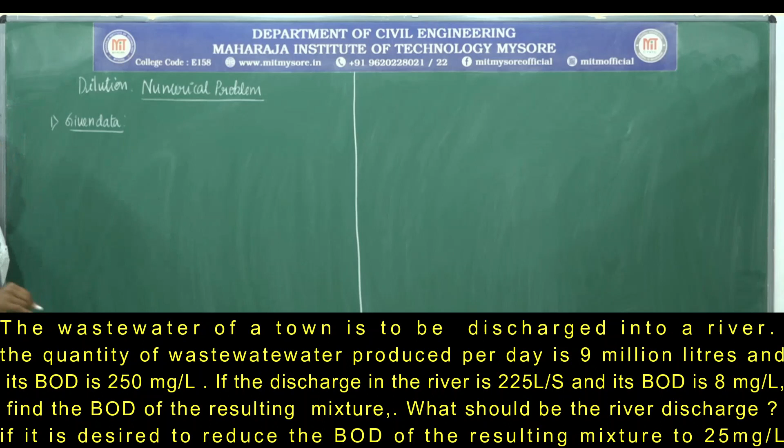Okay, now let us solve the numerical problem related to dilution. First problem, what is the given data? The wastewater discharges - what is the amount of wastewater discharged into the river? Please do have a flow diagram while analyzing the question.

There is a discharge of the wastewater, QE, with concentration CE. There is a discharge of the river, QU, with concentration CU. This wastewater is discharged into the river.

The quantity of wastewater produced per day is 9 million liters, that is 9 MLD, and its BOD is 250 mg per liter. BOD is nothing but instead of CE, you can take it as YE, which is equal to 250 mg per liter.

If the discharge in the river is 225 liter per second, and its BOD is 8 mg per liter, I'll take it as YU or CU, which is 8 mg per liter. Don't confuse it with ultimate BOD, it is the upstream or river value.

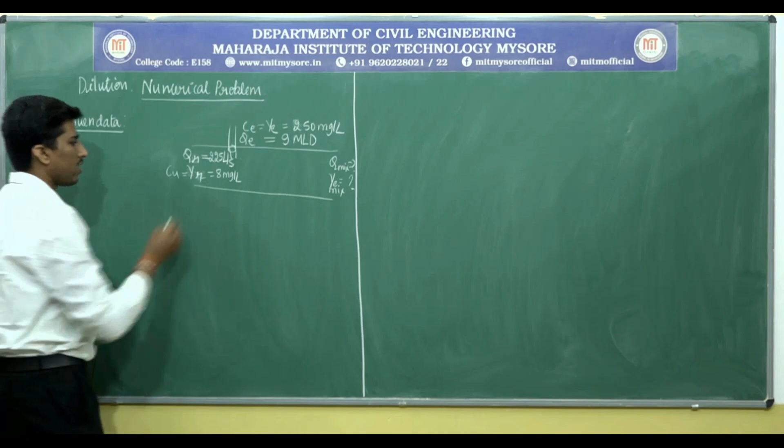Find the BOD of the resulting mixture, they have asked - that is Y mix. When they discharge in combination, you can also determine what is the Q mix. This is how you need to analyze the problem in the case of a river or stream.

What is the formula given? Whenever you need to determine the concentration - CE, YE, or Q into S - the general dilution formula is: S equals QU or QR, SR plus QE, SE, divided by QR plus QE. You can also denote it as Q.

Similarly, for the upstream part of the river, QR is 225 liter per second, YR is 8 mg per liter. The first part of the problem you need to determine is the BOD mix in the river.

Using the same formula, I need to determine Y mix, given as QR, YR and QE, YE divided by QR plus QE. This is equal to QR into YR, that is the concentration mass loading rate, at 225 liter per second.

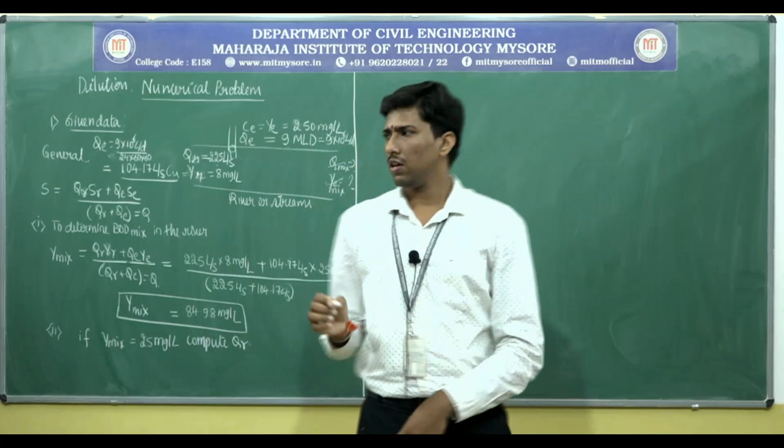Second question: if Y mix is 25 mg per liter, compute QR. Now let us take it this side. Again apply the same formula. Here Y mix is equal to QR into YR plus QE into YE, divided by QR plus QE.

Now you need to compute QR if the Y mix is 25 mg per liter. So 25 is equal to QR, I don't know what is the discharge, but YR I know, same concentration, into 8, plus QE given as 104.17 liter per second into YE value, which is 250 mg per liter, plus QR I don't know.

QE is given as 104.17. Now, which implies that 25 into QR plus 104.17 is equal to 8 times QR plus 104.17 into 250. How much are you going to get?

104.17 into 250 gives 26042.5.

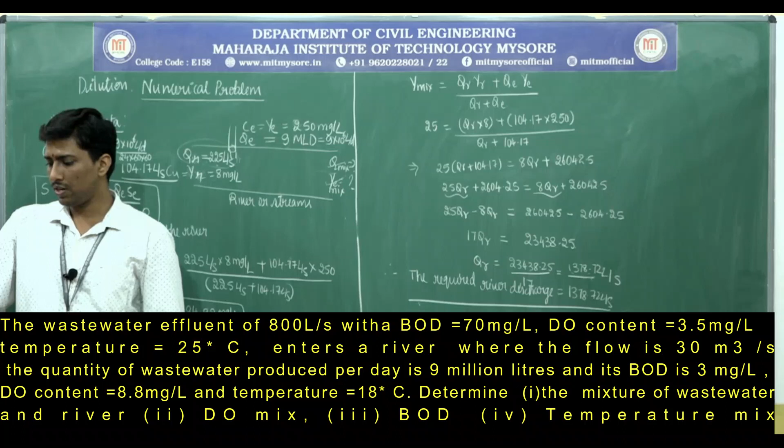Let us get to know what is the background concentration. Make a diagrammatic representation, it will be easy for you. Given data, by reading the problem you need to analyze what are the contents.

Again there is a flow of the wastewater having the background concentration BOD, DO, I could take it as C, and temperature is equal to. Similarly for the river discharge, BOD concentration, DO concentration, as well as the temperature also.

How much are they asking? The wastewater effluent of 800 liter per second, with BOD given as 70 mg per liter, Y is equal to 70 mg per liter.

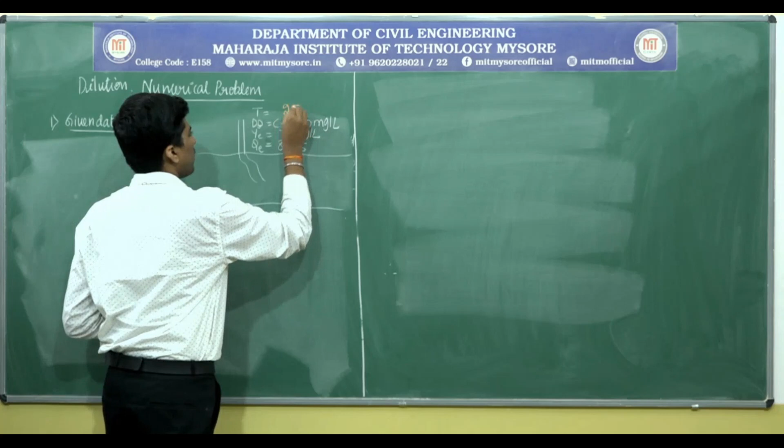And C is given, what is that? The DO is 3.0 mg per liter. And temperature is equal to 25 degrees Celsius.

Enters a river. This is the wastewater effluent discharge. This is the river. Mixing process.

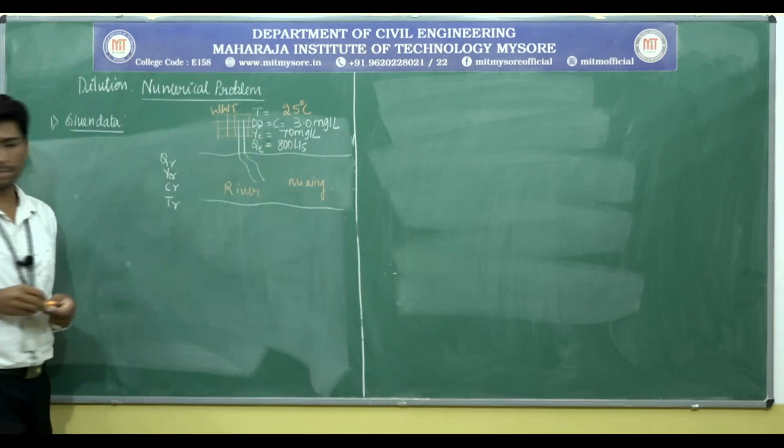Enters the river, the flow is 30 meter cube per second. Observe it clearly, this is 30 meter cube per second, whereas this is in terms of liter per second. You need to convert it in terms of meter cube per second.

Next, YR is given, what is the YR value? The BOD is 3 mg per liter. What is the DO concentration? 8.8 mg per liter. And the temperature is 18 degrees Celsius.

What have they asked? First, determine combined discharge - obviously you need to determine what is Q, that is nothing but the downstream discharge. Second, combined discharge BOD. Third, they are asking about the DO. And fourth is related to the temperature.

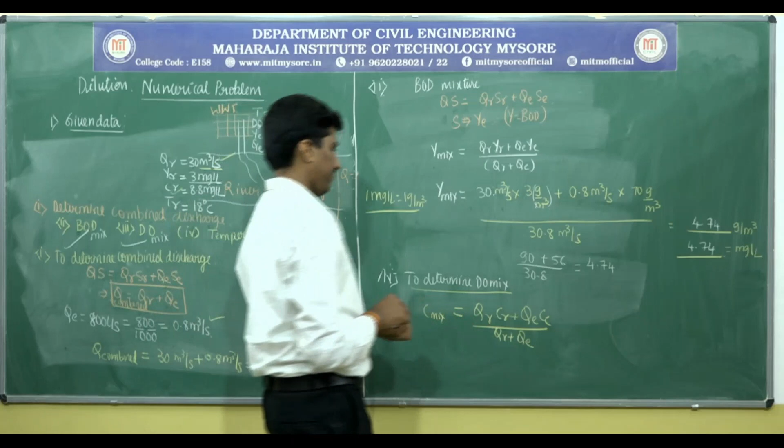C mix is equal to QR.CR plus QE.CE divided by QR plus QE. C mix you have got to replace it by this formula. Replace it instead of YE here, you can take it as CE. Now what happens? QR, what is the discharge?

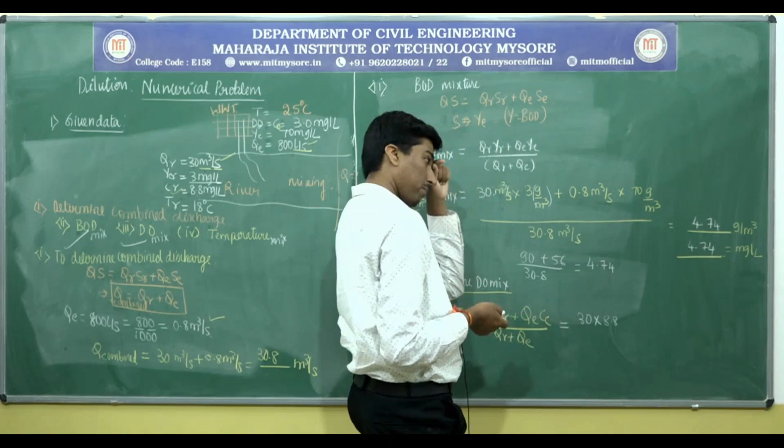Given as 30 into what is the concentration of DO here? It is 8.8 mg per liter. Again it is converted in terms of gram per meter cube, plus 0.8 is the discharge of the effluent, 0.8 meter cube per second, into the DO which is 3.0 mg per liter. That is divided by 30.8.

2.4 plus 30 into 8.8. So here we will get it as 30.8, 30 into 8.8 plus 0.8 into 30, gives 264 divided by 30.8. The resulting DO mix is 8.57 mg per liter, or it is also expressed in terms of grams per meter cube.

Remaining part is what? To determine what is the T mix. Replace CR by T, or replace it by T, whatever formula we are applying here, you need to replace it. Now the third one is to determine the temperature mix. T mix, temperature mix, is equal to QR into TR plus QE into TE, divided by QR plus QE. We call it T mix.

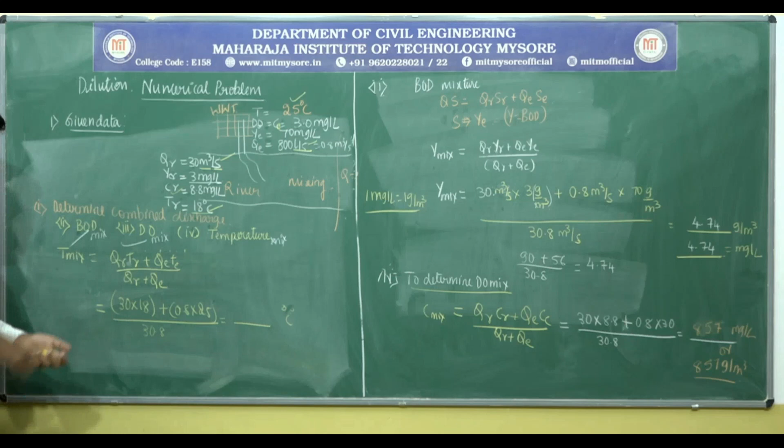Divided by 30.8, how much? Calculated and expressed in terms of degree Celsius. 30 into 18, plus 0.8 into 25, 0.8 into 25 gives you, total of 560 divided by 30.8. The average resulting temperature you get is 18.18 degree Celsius. This is how you need to determine the temperature mix conditions.

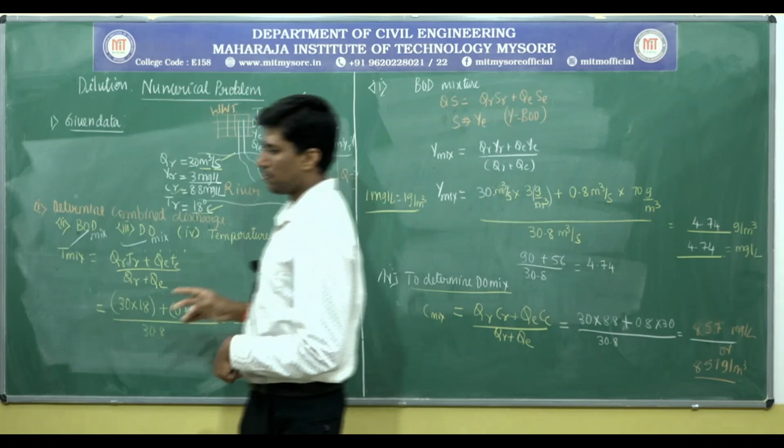In any of the question papers, or wherever they ask for any discharge concentration, you need to determine it by application of the dilution technique, or the method of estimation of the wastewater discharge. Okay, getting the points clear for this. Now take down the next problem.

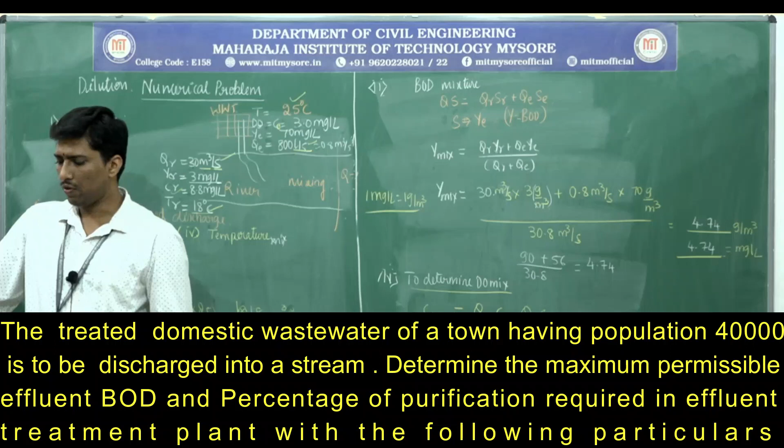It is quite different. The treated domestic wastewater of a town is to be discharged in a stream. Determine the maximum permissible effluent BOD and the percentage purification required in the treatment plant, with the following particulars. What are those? Let us get to know the others. Population of town is 40,000, given data. This is the third problem. Population of a town is equal to 40,000.

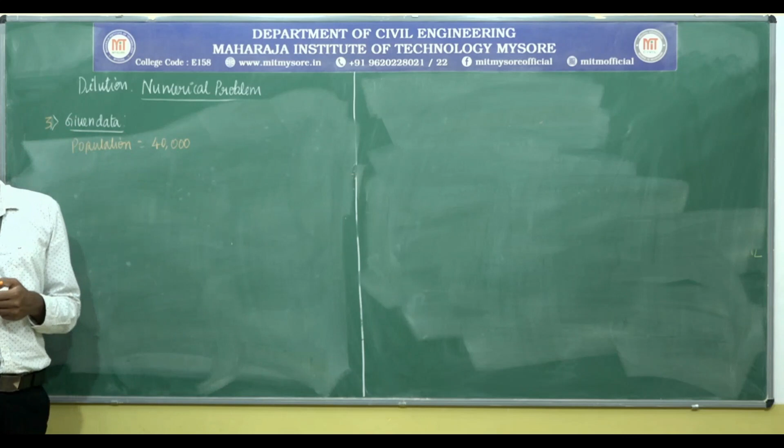Minimum flow of stream is QS here. It is QS, minimum flow of stream, how much? 0.15 meter cube per second. Next, BOD of stream, you can take it as YS. BOD of stream YS is equal to, how much concentration? 2 mg per liter. Dry weather flow of wastewater.

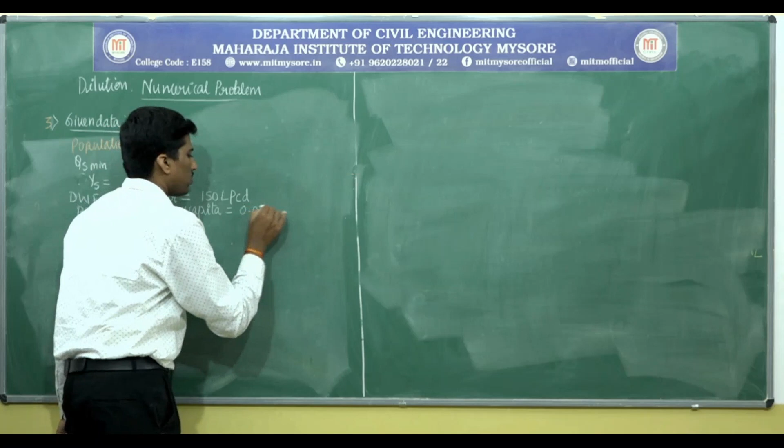Wastewater is equal to how much? 150 liters per capita per day, that is 150 LPCD. BOD contribution per capita is equal to how much? It is 0.075 kg per day.

Maximum BOD of stream on downstream is equal to how much? Given as 5 mg per liter. Now let us analyze the same set of flow conditions.

It is given, stream population is given, BOD contribution I need to estimate. What is the discharge as well as the BOD I need to determine, then only I can get to know what is the purification given. Here contribution per capita is given as 0.075 kg per day. Now let me compute what is the dry weather flow of sewage.

I need to determine what is the QE. Q of dWF is equal to question mark. Now solution I need to provide it. First, determine the dry weather flow.

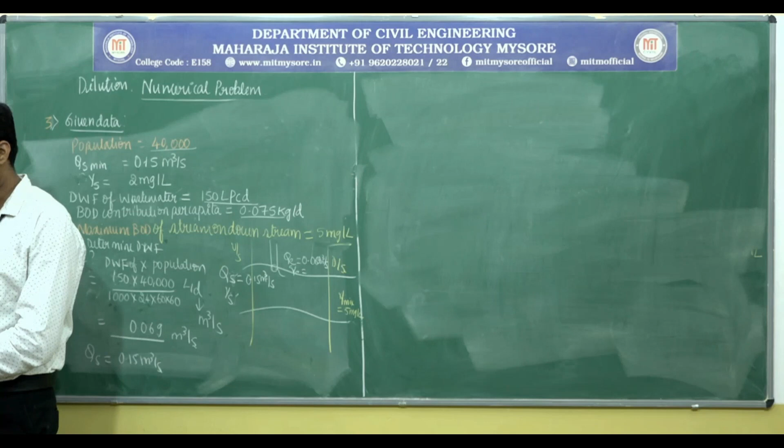Observe the question carefully here. Determine the maximum permissible effluent BOD and the percentage of purification required. Maximum permissible effluent BOD. That is, YE is a question mark, because YS is given as 2 mg per liter.

Solve the formula. We know the dilution factor formula, that is, I have the maximum BOD, the downstream is given as, so Y mix is equal to QS into YS plus QE into YE, divided by QS plus QE. This is QS, how much it is? 0.15 into YS. YS is in terms of 2 mg per liter, 2 mg per liter into 2.

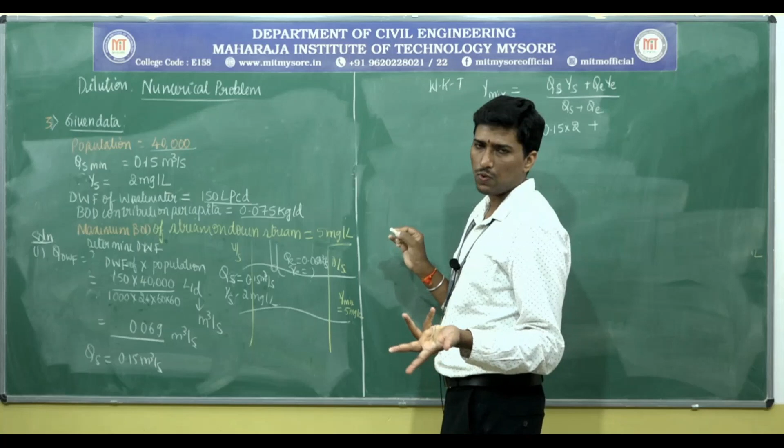Don't worry about the conversion factors. Anyhow, it is gram per meter cube only you are getting, the gram per meter cube is nothing but again 1 mg per liter. Now into 2 and QE, I know QE is equal to 0.069 into YE. I don't know what is the effluent contribution of the BOD, but have contribution per capita.

What is required is the maximum permissible limit, only 5 mg per liter. So this is the standard they have set. If you need to have the proper standards to comply with 5 mg per liter, what should be the discharge of the effluent containing the BOD concentration that they are specifying, or how much percentage of purification is required. YE divided by, QS is 0.15, again QE is 0.069. Y mix is given as how much?

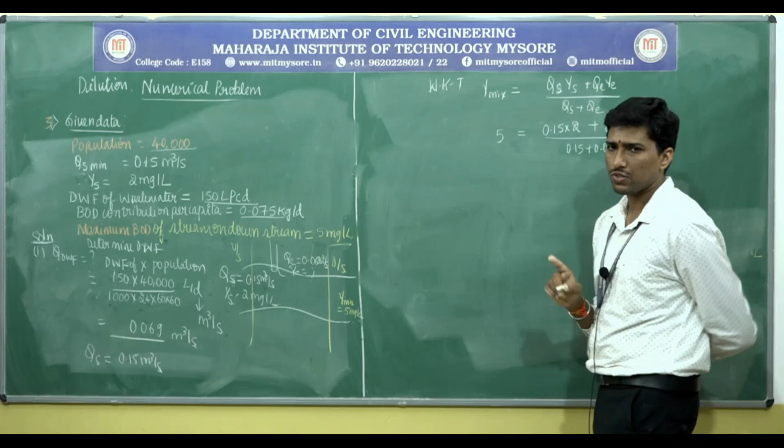At the downstream, it is 5 mg per liter, that is the maximum permissible limit concentration. This is how you need to analyze the problem. Simply you cannot go by heart, learning all these things.

Now I need to determine YE. So 5 into how much you are going to get it? 0.15 plus 0.069 is equal to 0.15 into 2 plus 0.069 times of YE. I'll make it as YE itself only. 5 into 0.15 plus 0.069.

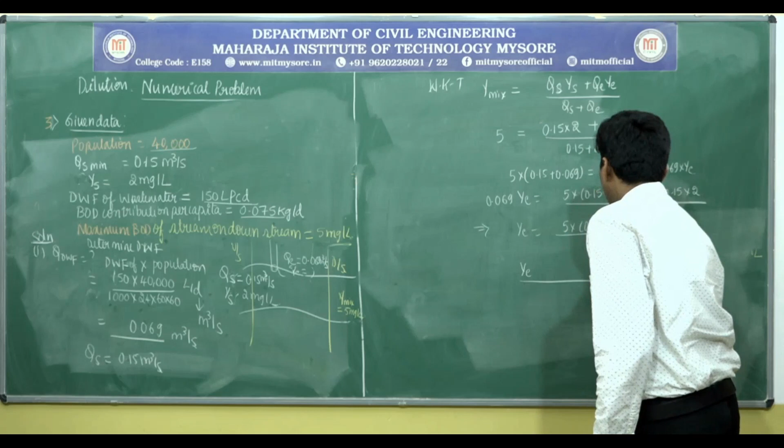Minus 0.15 into 2 divided, so this is 0.069 times of the YE, which further implies that YE is equal to 5 into 0.15 plus 0.069 minus 0.15 into 2, divided by 0.069. Compute what is the YE in terms of mg per liter.

This is how you need to compute it. After computing it, you get the answer as 11.52 mg per liter. What they are asking is the maximum permissible BOD, maximum permissible BOD is 11.52 mg per liter in the effluent discharge.

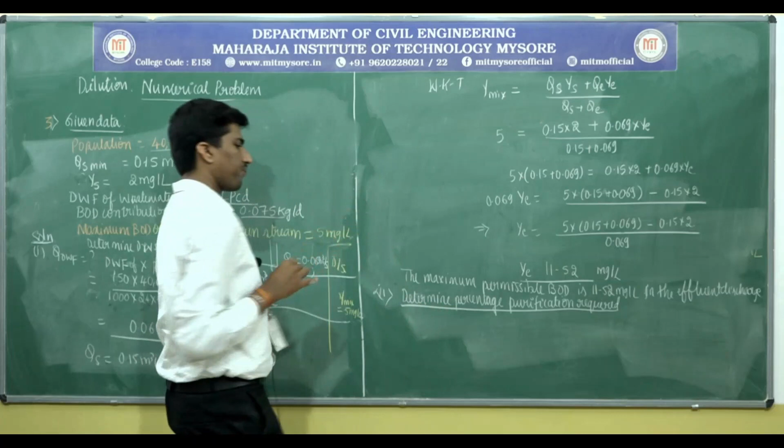Effluent discharge. Second, they have asked what is the percentage of purification required. The next question: BOD and the percentage purification required in the treatment plant. Determine percentage purification required. I need to determine what is the concentration, if the maximum permissible limit is given, what was the actual concentration I need to determine.

Actual BOD of effluent I need to find out. First, determine actual BOD of effluent. That is given by BOD in mg per liter, which is nothing but the per capita contribution.

That is, BOD contribution is 0.075 kg per day, and we have it, I need to get it in terms of effluent BOD in mg per liter, that is BOD contribution in per capita divided by.

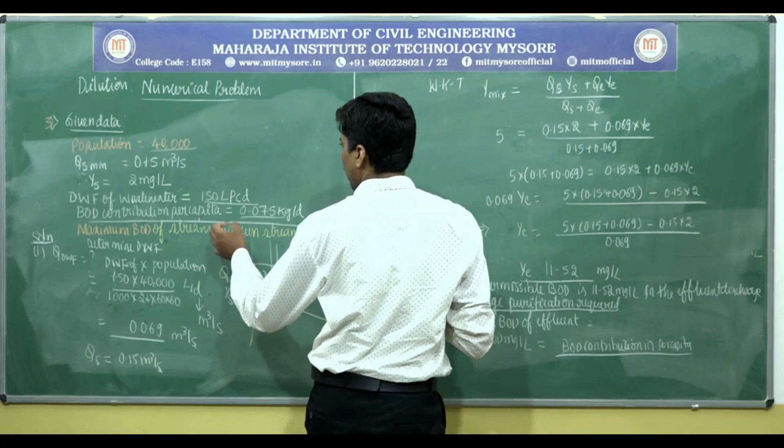They are asking the concentration, so C is nothing but W divided by Q. The waste effluent discharge, that is per capita, they are asking it as dry weather flow. What is dry weather flow? Remember the formula, this is helpful.

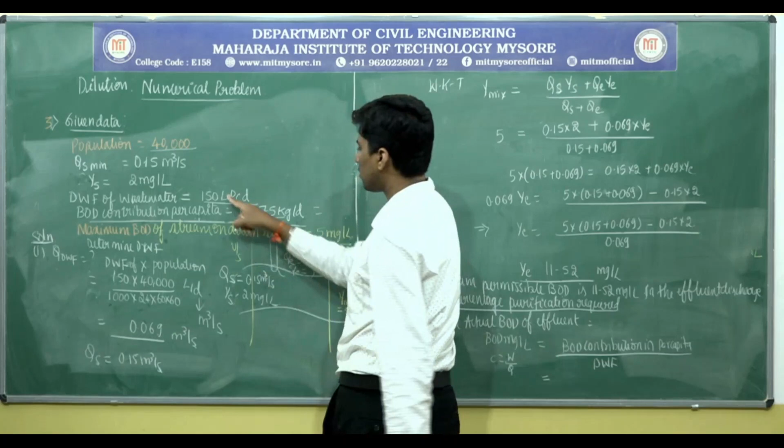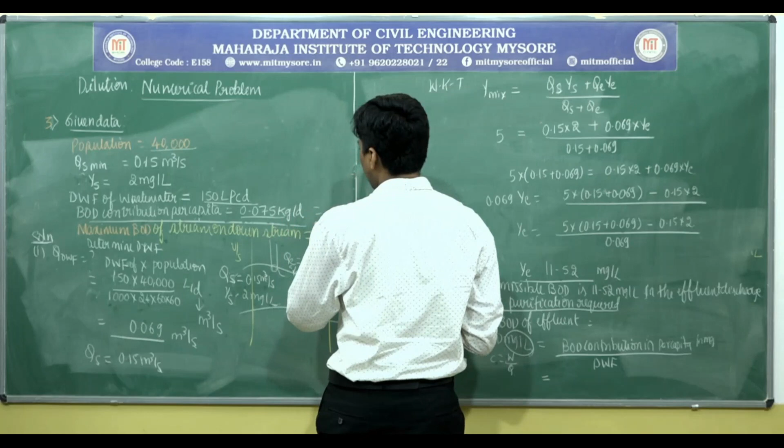How much BOD contribution is given as 0.075 kg per day, and here it is in terms of liters. What I require is BOD in terms of mg per liter. I need to convert the kg into mg. So multiply by 10 power 6, because 1000 milligrams makes 1 gram, again 1000 grams makes 1 kilogram.

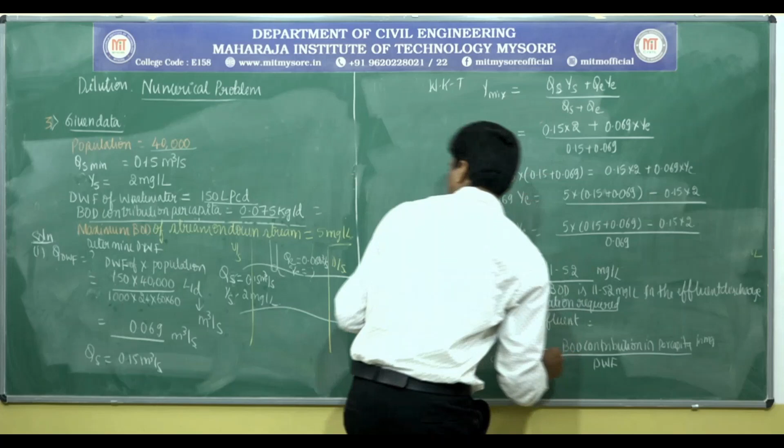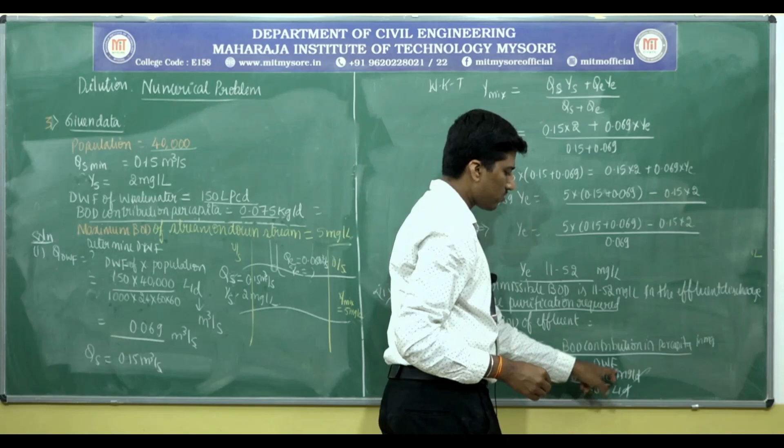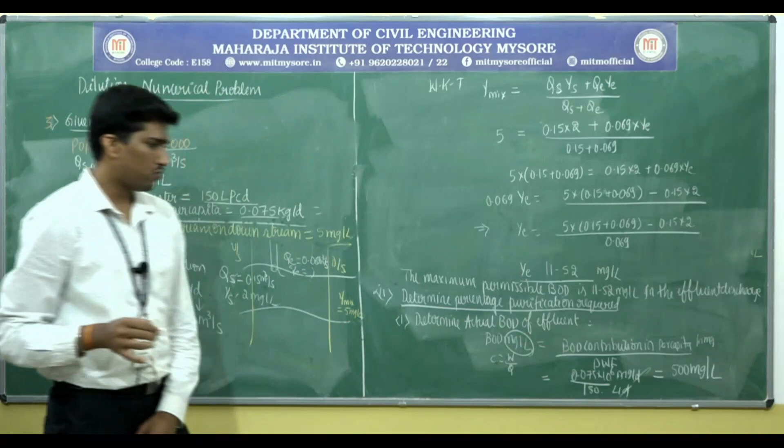0.075 into 10 raised to 6, divided by 150. This is in terms of kg, mg per day, and this is in terms of liters per day. Per day and per day get cancelled here. 0.075 into 10 raised to 6 divided by 150, that is equal to 500 mg per liter, because 15 times 5 is 75. This is the actual, Q actual, that is YE actual is 500 mg per liter.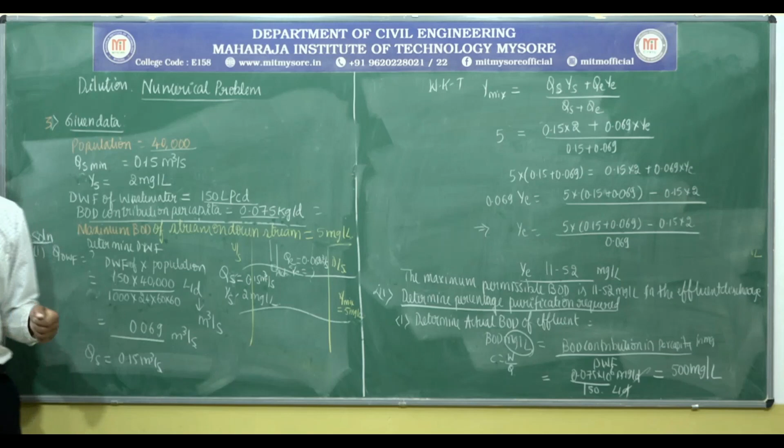But Y mix changes. If desired, how much is the percentage of purification? You need to determine it. Okay, let me complete it here. Thereby, compute percentage of purification.

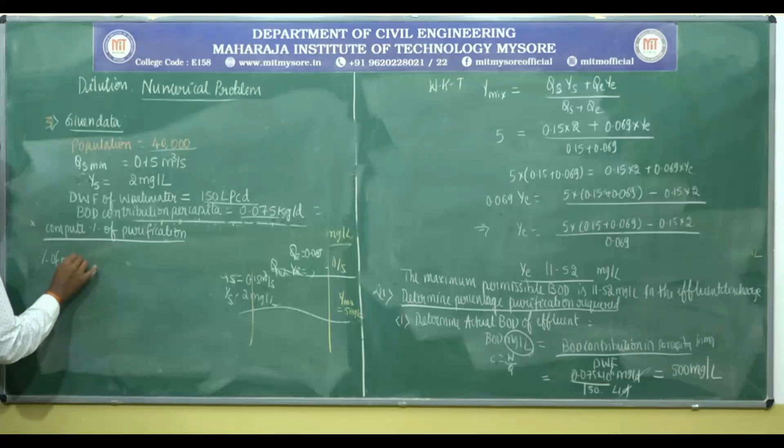Percentage of purification. When you compute the percentage of purification, it is expressed as actual, that is Y actual, BOD of the actual, minus what is the permissible BOD, Y permissible, divided by actual, Y actual, whole thing multiplied by 100. I don't have space here, that's why I am writing it here.

That is Y actual is equal to 500, getting it, 500 minus permissible is how much, 11.52, maximum permissible 11.52, divided by 500, gives you into 100, in terms of percentage, 500 minus 11.52 divided by 500, it is around 97.7%.

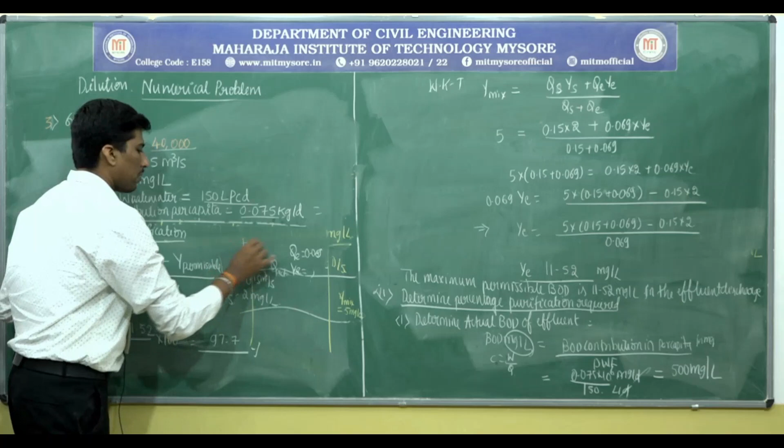97.7%. That means when you are discharging the concentration percentage, for you getting 11.52, instead you have it as 500. To bring down 500 to 11.52, 97.7% of purification, so the efficiency of the treatment has to be imparted in the wastewater treatment plant. Efficiency should be equal to 97.7%. That's what they are asking.

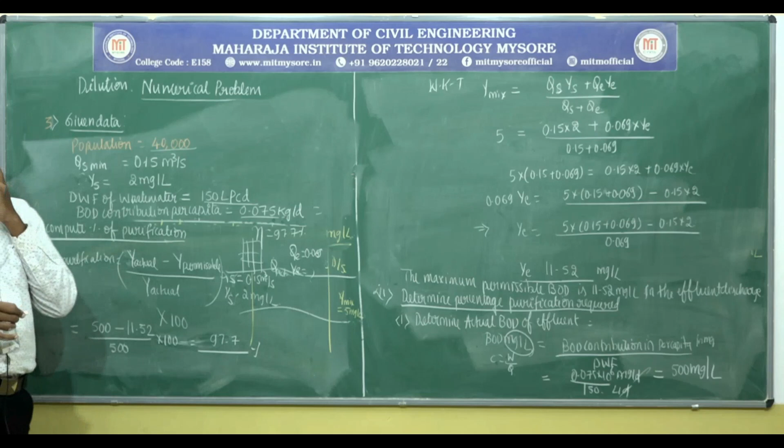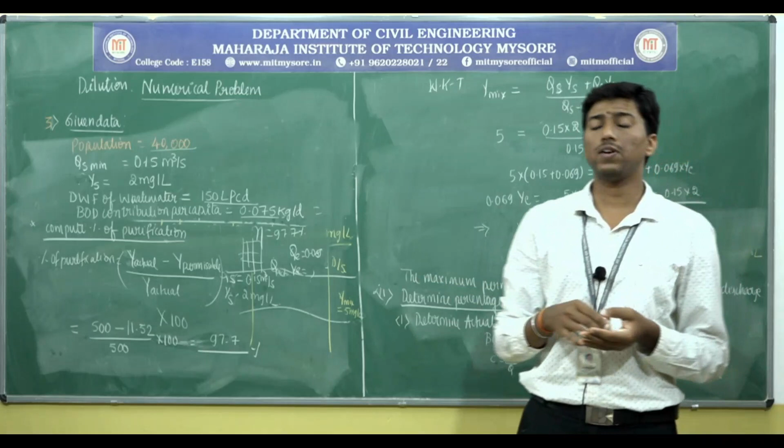Okay, these are another set of problems that we tend to solve. Hope you have understood the problem, how to calculate in these situations. Analysis becomes very much important in wastewater effluent disposal. Here onwards, thinking as well as analyzing becomes very important, and applying the concepts in practical aspects through the line diagram is important. With this, I'll wind up the class.

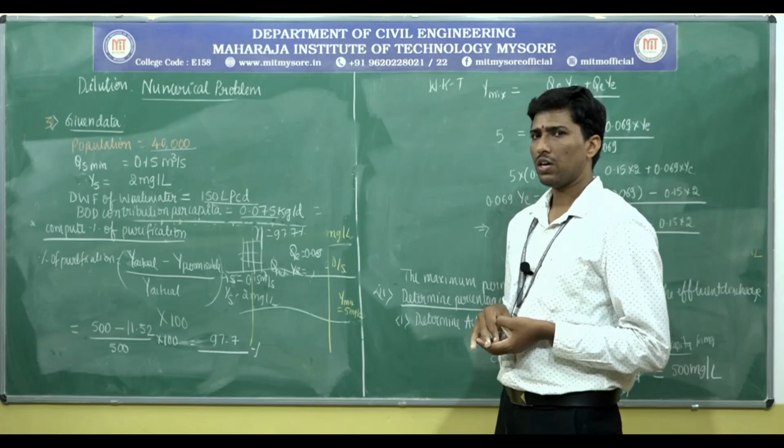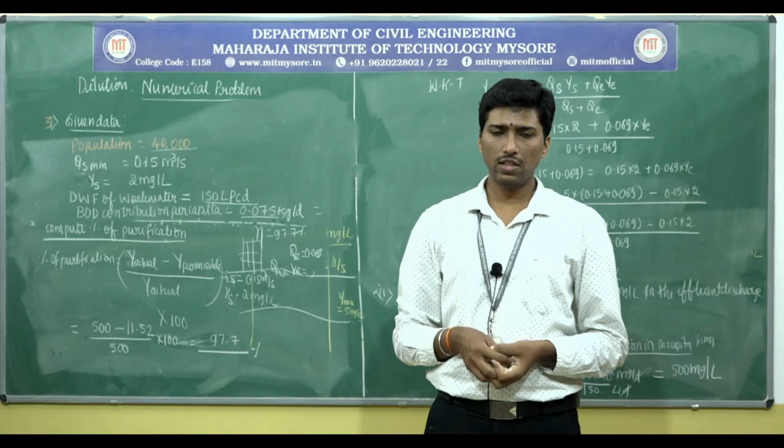In the next stages, let us take up the oxygen sag curve and Streeter-Phelps equation related to the zones of recovery, how the equations help to resolve the crisis if the DO deficit tends to happen. Stay tuned for it. Let us continue in the next part of the class. Thank you, one and all.